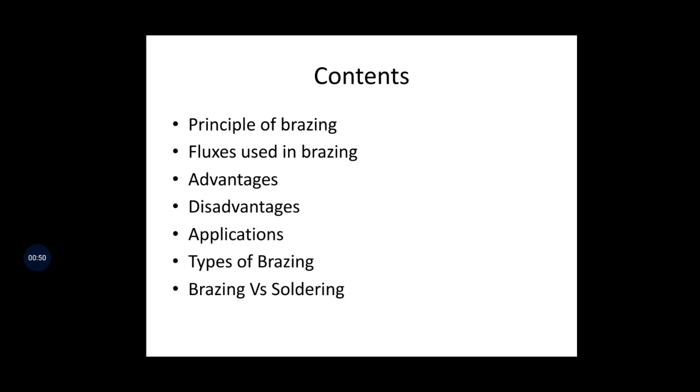Principle of brazing: brazing is also a method of joining. We use this method for similar and dissimilar metals, but the temperature is more than 450 degrees Celsius. In soldering, temperature is 450 degrees Celsius, but in brazing it is above 450 degrees Celsius, but below the melting point of the base metal. So if the base metal melting point is, say, 800 degrees Celsius, we are not reaching that temperature.

Base metal means the workpiece - whatever workpieces you want to join, that is called the base metal. That base metal temperature stays below its melting point; we are not melting the base metal. So it is above 450 degrees Celsius, but below the base metal melting point. If base metal melting point is 800 degrees Celsius, you have to stay below that only - that is brazing. We are not totally melting the base metal.

We use a filler rod here, called a spelter. In soldering it was called solder, but here it is a spelter. It is a non-ferrous alloy - spelter is made up of a non-ferrous metal or alloy. Non-ferrous means not ferrous - it may be aluminum, zinc, copper, or tin. It is not at all a ferrous metal, it is non-ferrous, or it may be an alloy also. Mostly we use copper and copper alloys, or aluminum alloys, silver alloys as the spelters for brazing.

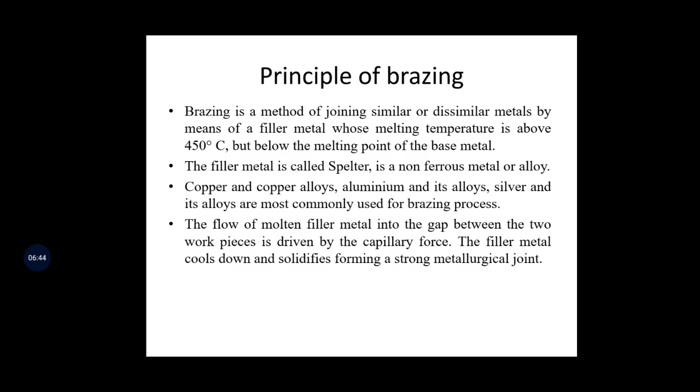Next we see the brazing principle figure here. We are using a flame to heat the surface. Here is a job, and here is also a job - two jobs are there. You need to join this cylindrical part to this square part. You require a welding torch, using oxygen and acetylene. This is a filler rod, which you have to melt. Once you melt it, the molten metal flows into the gap, and after solidification, the two metals become joined. It's very simple - this cylindrical part and square part need to be joined by means of brazing.

So in this brazing process, for heating this filler rod, we use a spelter. Once you heat this spelter, it becomes molten metal - it starts liquefying, but in hot condition it starts flowing. The solid part becomes liquid and accumulates in the joint gap. After solidification, both job 1 and job 2 become a strong joint. So this is what brazing is.

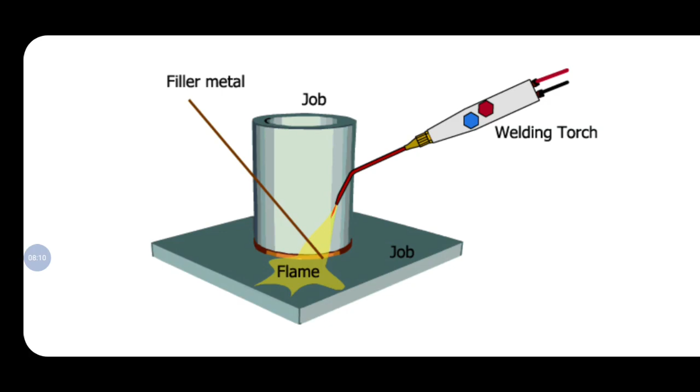Next, fluxes - we need to use fluxes here too, for the same purpose as in soldering. The purpose of flux in soldering is the same in brazing. You have to prevent oxidation, and you have to make the workpiece area wet. The same applies as in soldering - you have to prevent oxidation there too.

You have to preheat the metal. It also cleans the surface by dissolving metal oxides. These are the functions of the flux. What we are going to write in the examination for soldering, the same thing is applicable here for brazing. The functions of fluxes are the same - there are no changes.

But the fluxes may differ - there we use different fluxes, here we use different ones. Here we use borax or a mixture of borax with other chemicals, whereas in soldering we use rosin and alcohols.

So how to apply the flux? Fluxes are available in liquid form, paste form, and powder form. One method of applying flux is to dip it - the powder can be dipped. Applying flux in powder form means dipping the heated end of the filler rod into the container of powder flux, so that the flux sticks to the filler rod.

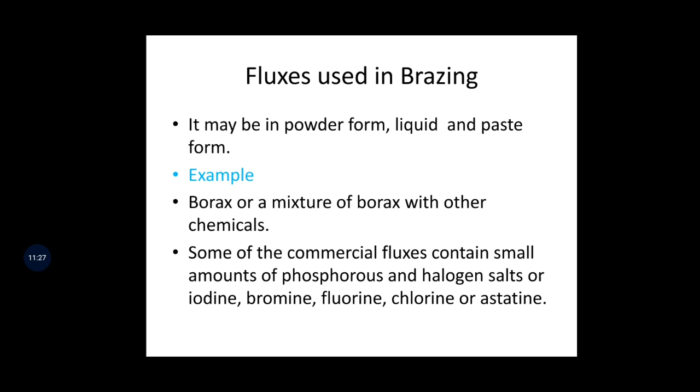You can also give some kind of coating. So these are the ways we apply flux in the case of brazing on the workpiece. Next, some commercial fluxes are available, like small amounts of phosphorus and halogen salts, iodine, bromine, fluorine, chlorine, astatine.

Next, advantages. Any metals can be joined, including dissimilar metals. Certain brazing methods can be performed quickly. Brazing can be applied to join thin-walled parts that cannot be welded.

Thin parts, which you cannot weld, because if you weld them, they will melt. That is why you cannot go for welding for such applications or components; you go for the brazing process. But thin here is not like soldering. For soldering it becomes heavy; soldering is thick, but for brazing it is thin. For brazing it is suitable like that. So brazing can be applied to join thin-walled parts that cannot be welded.

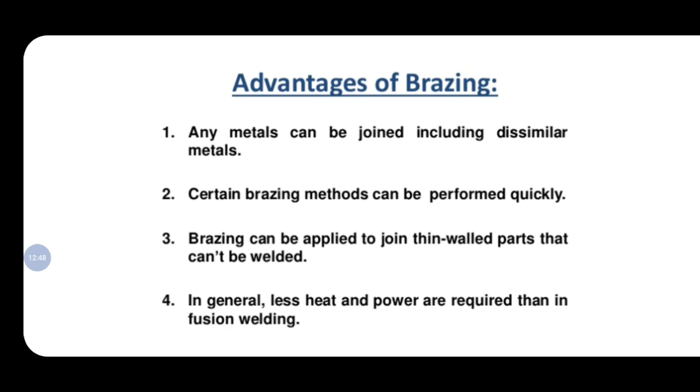In general, less heat and power are required than fusion welding, so it is easily automated. Dissimilar parts can be joined, as I told you. Much heat is not involved, so there are low thermal distortions and low residual stresses in the joint.

Next, disadvantages. Joint strength is generally less than the weld. Obviously, because it is not a permanent joint. Welding is the only permanent joint. You can just remove the brazed joint by your hand; you can break it by hand itself.

Although the strength of a good brazed joint is greater than that of the filler metal, it is likely to be less than that of the base metal. So the joint strength is always less than the base metal. High service temperature may weaken the brazed joint; when you use high temperature, the joint strength of the brazing will decrease.

The color of the metal in a brazed joint may not match the color of the base metal parts, which is a real problem. Also, it is expensive since the filler metal is expensive. Large and thick sections cannot be brazed efficiently. Flux residues must be removed after brazing, otherwise they may cause corrosion. These are some of the disadvantages of brazing.

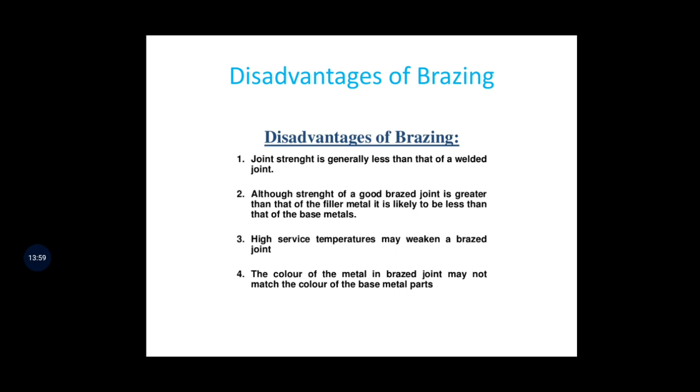Next, applications of brazing. It is used for fastening radiators, electrical parts, tanks, pipe fittings, plumbing, axles, and more. It can be used to join dissimilar metals, cast metal, ferrous metal, bronze metals, and copper metals, bronze alloys. It is used to join band saws and bicycle parts such as the rims and frames.

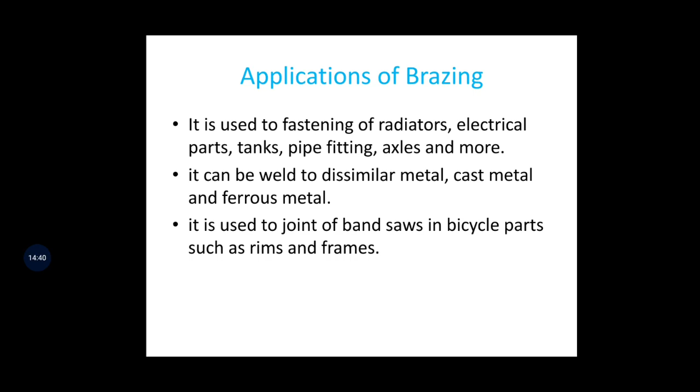Next comes types of brazing. Types of brazing means: what are all the ways you can heat the part? That is the main thing, the heating conditions. There are 5 ways to heat the part. The first one is torch brazing, which is generally used.

Next is furnace brazing, then dip brazing, resistance brazing, and induction brazing. These are the 5 ways in which you can braze or heat the metal. That is the types of brazing. Brazing methods and concept are the same, but what differs are the ways in which you can heat the metal; that is classified into these 5. Many more exist, but from the syllabus point of view, 5 are given here.

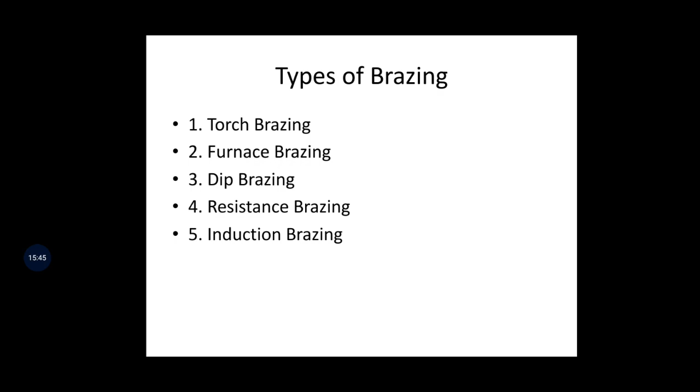Torch brazing means you have to use oxygen and acetylene gas, both mixed in proper proportions, then use a lighter to get the flame. This flame can be used to heat the metal with a filler rod, and that way you can join the two parts.

So you can see here the flame, where we are joining the 2 pipes. These are the oxygen and acetylene cylinders, and this is the torch. Through this only we are going to get a flame. You have to mix these gases in the proper proportions.

Then you adjust the flow of oxygen and acetylene gases in a 1:1 ratio. You will get a mixed gas outside. When you use the lighter to ignite this mixed gas, you will get a flame, and that is the flame you are seeing here. So then we get heat, and we can join the 2 parts.

So this is about torch brazing. As usual, you have to prepare the surface first, that is, remove dust, grease and other oxides. You have to clean it, then apply the flux at the joint. You can use borax, boric acids, fluorides, chlorides - these are the commonly used flux materials.

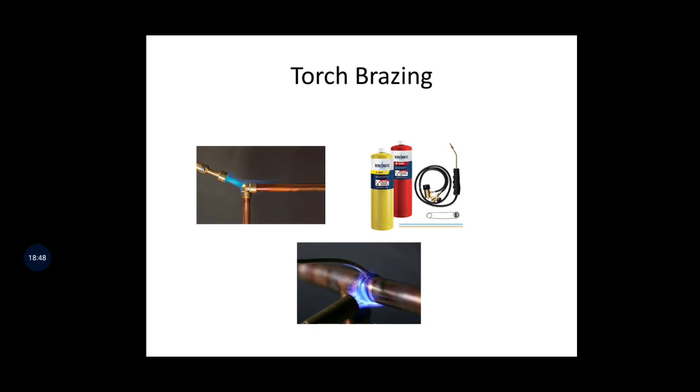Then you can remove and clean it, removing the flux residues in order to prevent corrosion. So after a brazing process, you compulsorily have to remove the corrosion and the fluxes - any extra flux on the component has to be removed and cleaned, otherwise it may corrode in future. That is torch brazing.

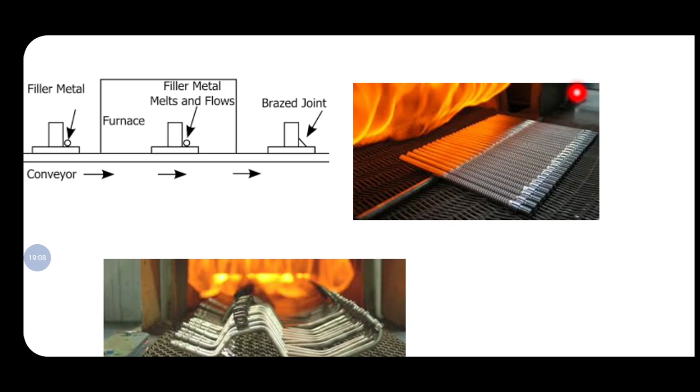Next is furnace brazing. I will show this part here. So many components are there - all these components at a time you have to keep inside the furnace. You can see the furnace temperature here. At a time you can keep all the components inside the furnace and close it, and you will get a brazed product.

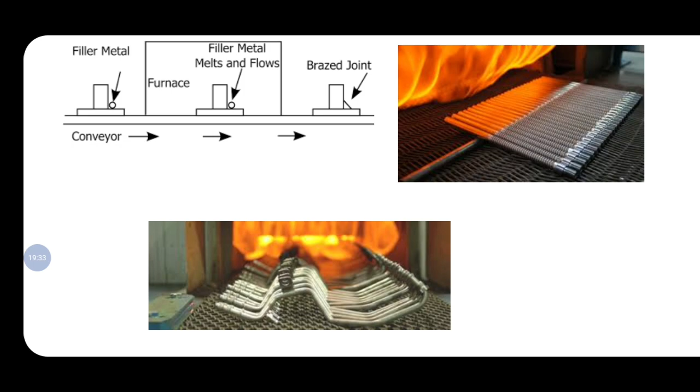Here is one more figure - so many components at a time being kept inside the furnace. After some time you remove it, then you get the brazed part, meaning a joint. So you have to apply all the flux, and then keep it inside the furnace using a conveyor belt. That is the furnace brazing.

Here you can see a filler metal line diagram. Filler metals are there, this is the furnace where it melts and flows into the brazed joint, and it's a conveyor. This is the filler metal you have to keep here. Once this entire component goes inside, the filler metal will melt and flow inside the joint, and afterwards it becomes a strong joint. It comes outside - that's how the furnace brazing is carried out.

It is used at high temperature. You have to use a non-ferrous filler metal, with melting temperature above 450 degrees Celsius, but below the melting temperature of the base metal. The filler metal is distributed in the joint by capillary action, as I told you. It is suitable for fabricating complete brazements - a big joint where the entire component is to be brazed. In such cases it is used for entire components, big brazements, and it does not require a highly skilled operator.

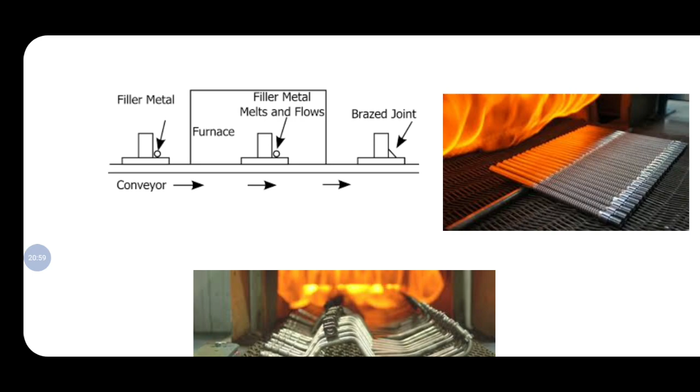For this, a highly skilled operator is not required. Pre-fluxed or pre-cleaned parts have the filler metal pre-placed at the joints. Pre-placed means we first place the filler metal before proceeding.

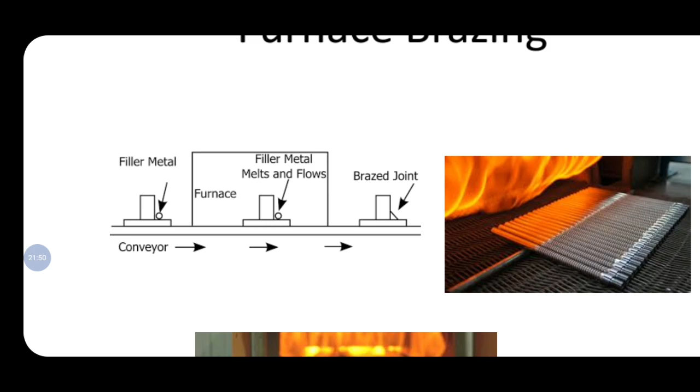The filler metal is pre-placed at the joints and heated in the furnace. So brazing can be done in an air furnace, with a flux, though a protective atmosphere is usually needed. The type of atmosphere required depends on combustion of natural gas or cracked ammonia. Dry hydrogen, a powerful reducing agent, can be used for brazing stainless steel, nickel, cobalt and iron base alloys. So this is about furnace brazing.

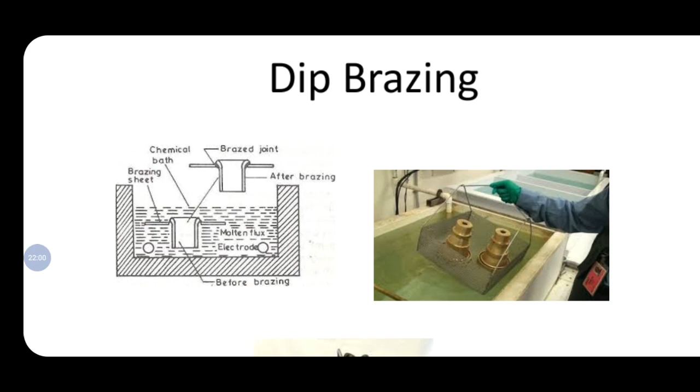Next, dip brazing. In dip brazing, you dip the entire metal to be joined. This is called dip brazing. It is mostly used for aluminum assemblies. The temperature of the molten flux bath can be controlled, and the molten bath serves as both a heating medium and a fluxing agent. So uniform heating to brazing temperature is achieved rapidly.

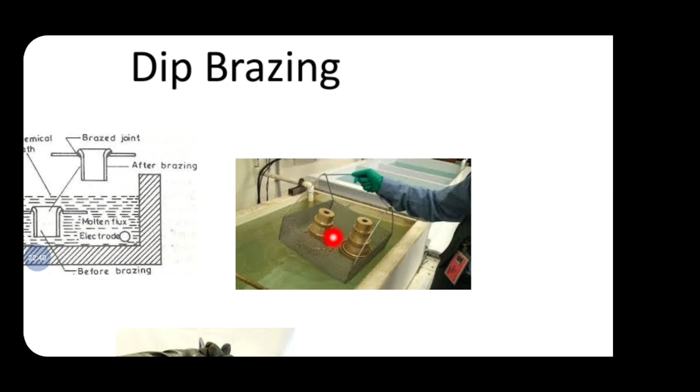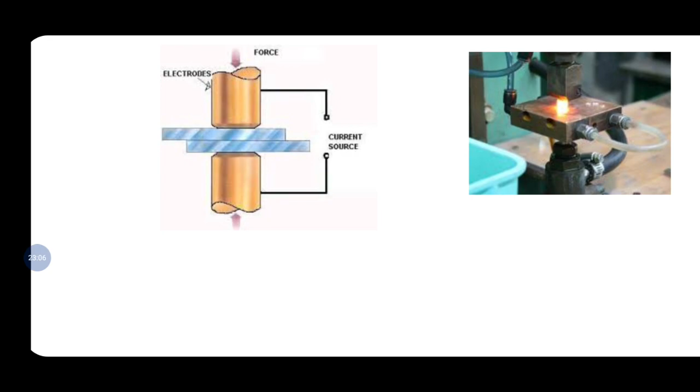Next is resistance brazing. It is suited for special joints where heat must be restricted to a localized area without overheating the surrounding parts. The heat required for brazing is produced due to electrical resistance offered by the joint members to the flow of current. Resistance means flow of opposing force. Once opposing force is there, automatically you will get heat.

So you can see here two components to be joined, with current applied. These are the electrodes, connected with electric supply, and you offer a resistance. Once you offer resistance, you get heat, and because of that heat you get the joint.

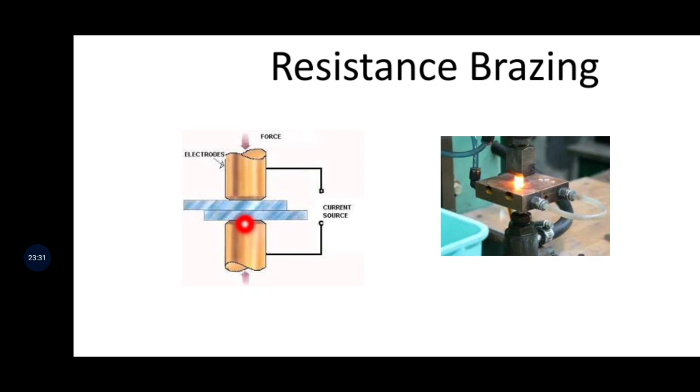Next is induction brazing. In induction brazing, the particular component you want to heat gets heated through inductance, so you can join through the induction process. Here we use an alternating electromagnetic field of high frequency for heating the workpieces, together with the flux and filler metal placed in the joint.

The workpiece is heated selectively by the coil, so induction brazing reduces unwanted part distortion or annealing. Induction heating brings the joint rapidly to brazing temperature. This is one of the fastest methods in the brazing process.

That is why induction stoves, you might have seen induction stoves, give you heat immediately so you can cook food, compared to natural gas stoves.

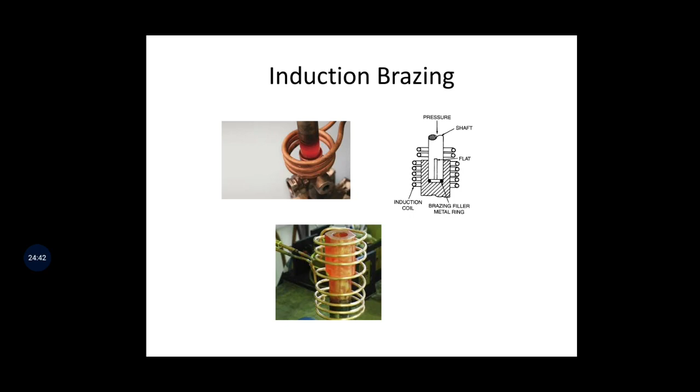Next, differences between brazing and soldering. In brazing, we call the filler rod a spelter, but in soldering we call it solder. Second, the melting point of the filler metal in brazing is above 450 degrees Celsius but below the melting point of the workpiece. In soldering, the melting point of the filler metal is below 450 degrees Celsius. In brazing, stronger joints are produced, but in soldering, less strong joints are produced compared to brazing.

Next, brazing joints resist corrosion, so brazing has the capacity to resist corrosion. But in soldering, the joints do not resist corrosion, so it does not have any corrosion resistance properties. Brazing is costlier, and soldering is cheaper.

Brazing can be used for thicker walled parts compared to soldering. Soldering is mainly for thin parts, while brazing requires some minimum thickness. Soldering is applicable for thin walls and mainly for electronic components, not much for mechanical parts and structures. But brazing can be used for mechanical structures and assemblies - these are the differences in brazing.